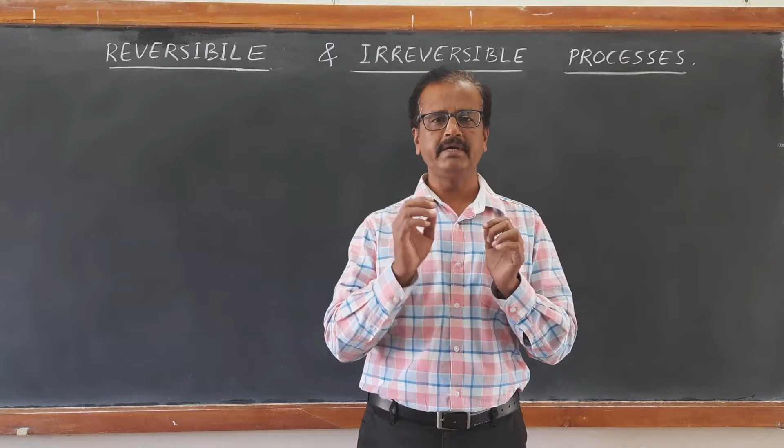Reversibility and irreversibility. First, let us understand the meaning of reversibility. Imagine a thermodynamic process which starts from initial state I and reaches final state F. Can it be possible to reverse this from final state F to initial state I without any change, without any effect in any part of the universe? In simple terms, if a thermodynamic process has taken place from initial state I to final state F, can it be completely brought back from final state F to initial state I without any loss of energy, without any loss of heat? If we think of this, we will get the answer.

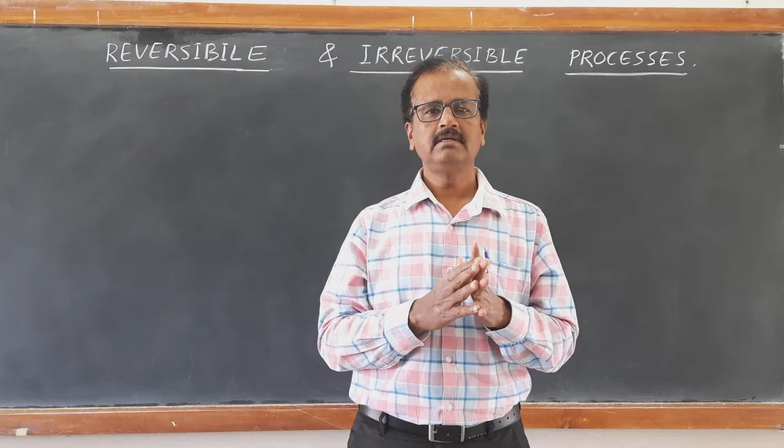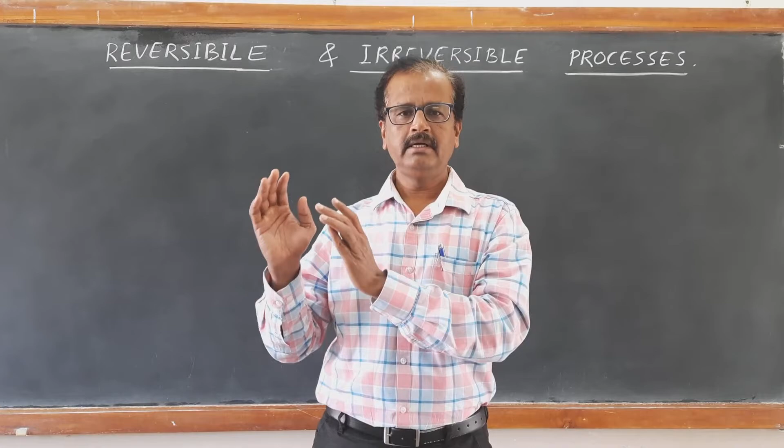Our experience tells us that it is not possible. So a reversible process is the one which, when it takes place from initial state to final state, can be reversed back from final state to initial state without any loss of heat, without any effect in any part of the universe. Such a process is called a reversible process, a reversible thermodynamic process.

But when we look at the spontaneous processes that take place in nature, we come to know that almost all the processes that take place in nature are irreversible. For example, when a chemical explosion takes place, when the explosion of a cracker takes place, sudden expansion of the gas takes place, sudden release of heat takes place. Can it be reversed back? It is not possible. Similarly, consider an internal combustion engine like a 4-stroke engine.

Or a bike engine or even a car engine, an automobile engine, when vapor of petrol mixes with air, and when the combustion of petrol mixed with air takes place with the help of a spark plug, sudden expansion and sudden release of heat takes place, which leads to doing work on the movement of a piston. Can it be reversed back entirely? It is not possible. So in this way, if you look at the spontaneous processes that take place in nature,

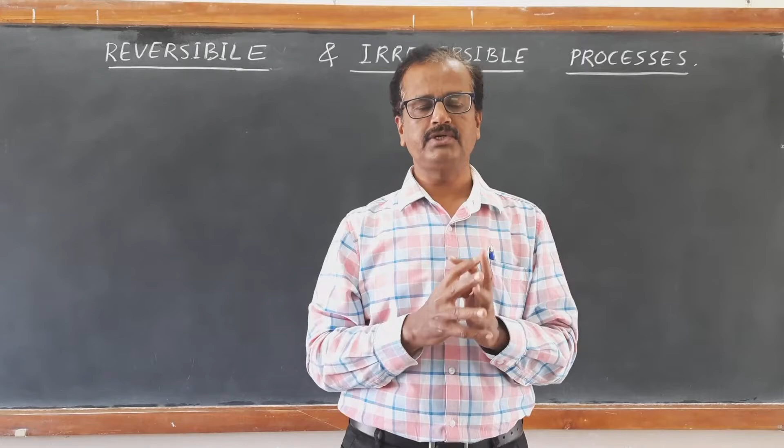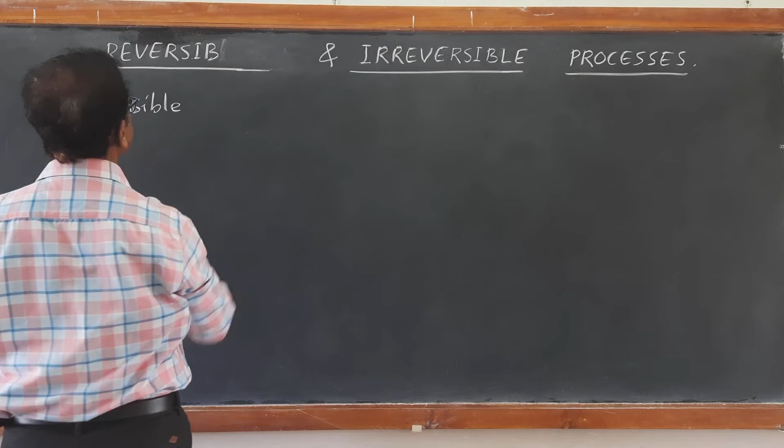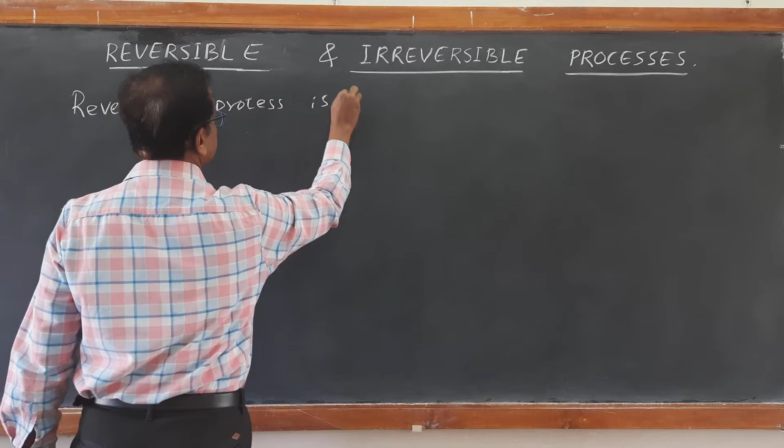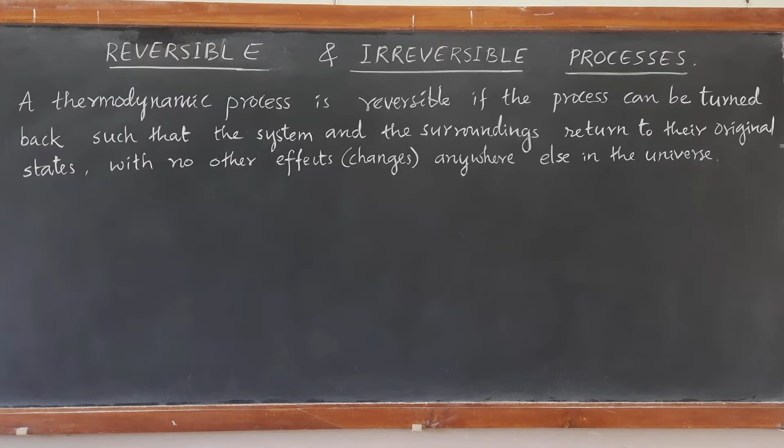So first we will define what is a reversible process. Reversible process is a thermodynamic process which can be completely reversed to attain the initial state, without any loss. A thermodynamic process is reversible if the process can be turned back such that the system and the surroundings return to their original states with no other effects or changes anywhere else in the universe.

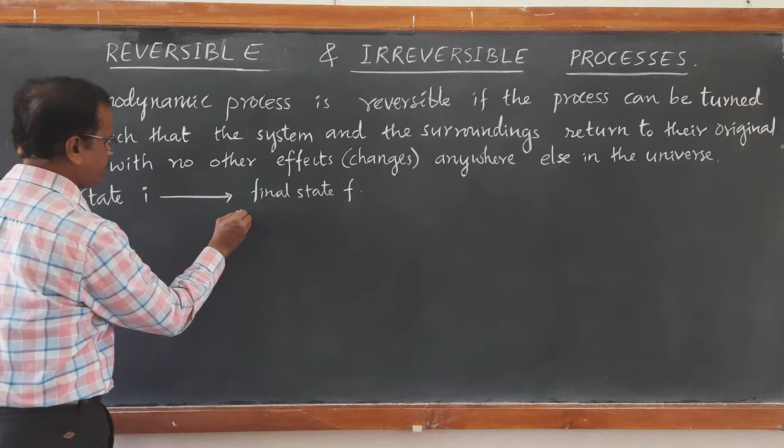If an initial state I changes to a final state F through a thermodynamic process, this can be turned back from final state F to initial state I without any change, without any effect in any part of the universe.

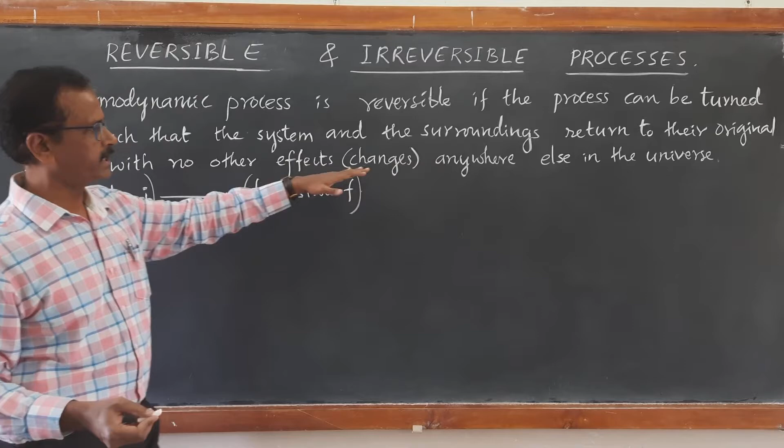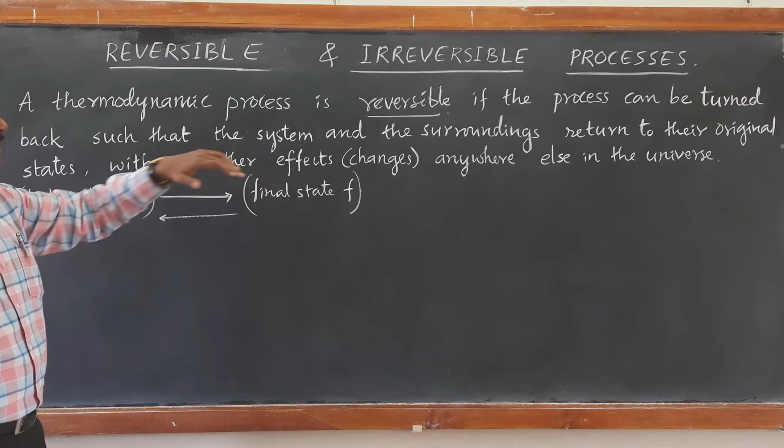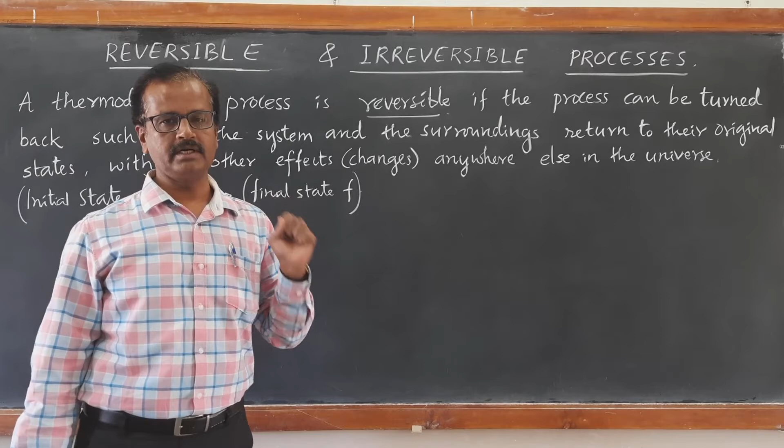Such a process is called a thermodynamic reversible process. A thermodynamic process is reversible if it can be turned back such that the system and surroundings return to their original states with no other effects or changes taking place anywhere else in the universe. This reversible process is a very ideal process which cannot take place in nature at all. So if it is possible, what kind of processes will be reversible?

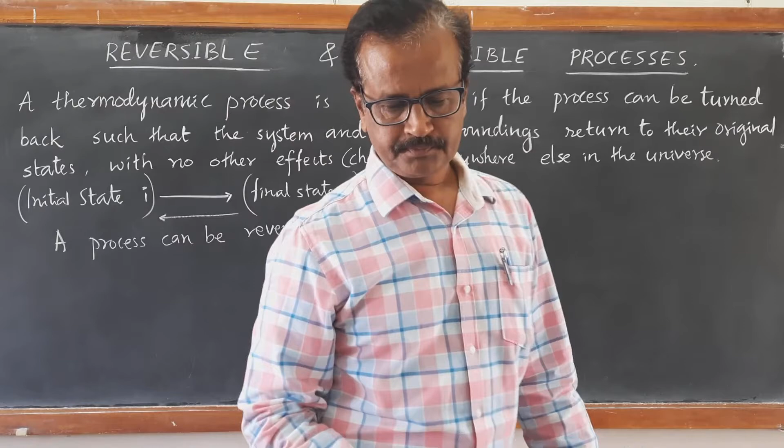A process can be reversible if there are no dissipative effects. No dissipative effects means there should not be any loss of energy in the form of heat, sound, deformation, etc.

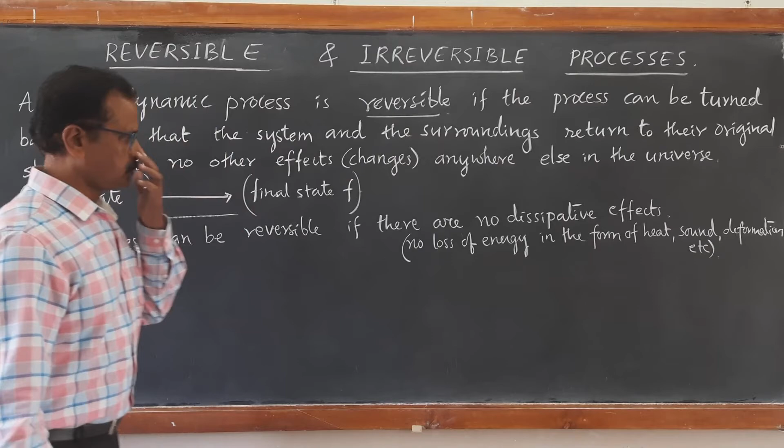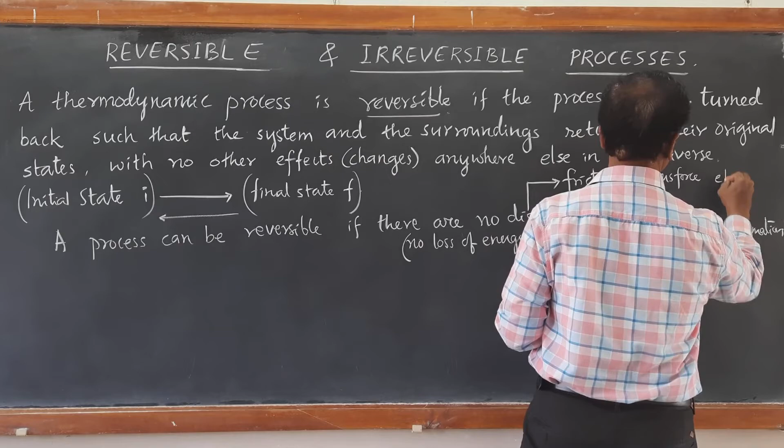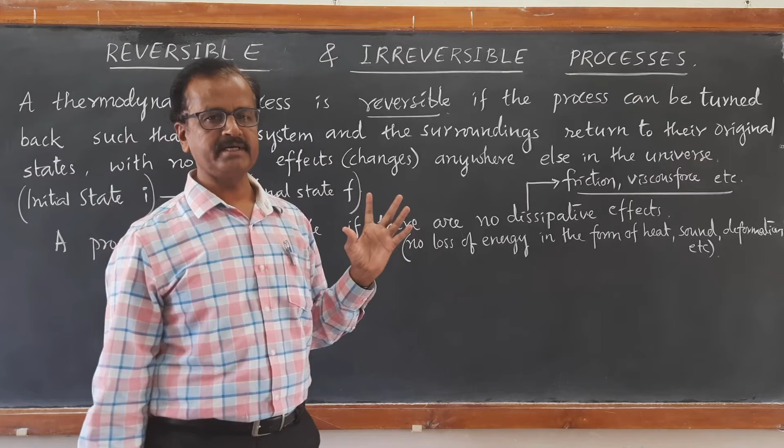If you take any spontaneous process that takes place in nature, there will always be some loss in the form of heat because of friction. So dissipative effects are mainly friction, viscosity or viscous force, damage due to collision, deformation, etc. Whenever work is done against friction or viscous force, some energy is lost against such dissipative forces. Such losses are called dissipative loss of energy, and the effects are called dissipative effects. If there are no such dissipative effects, then one can achieve a reversible thermodynamic process.

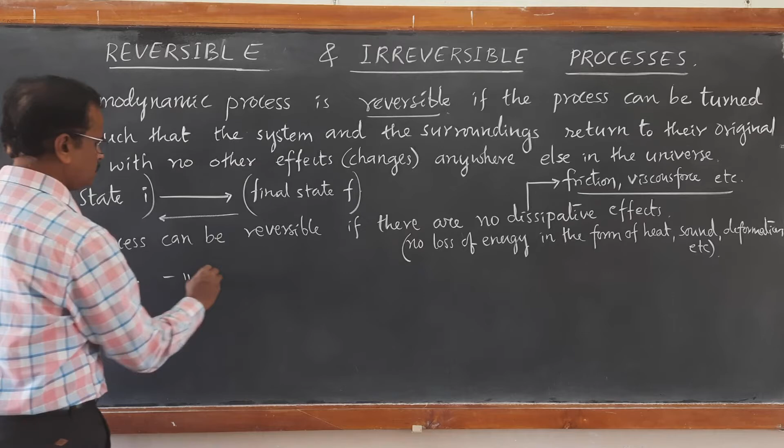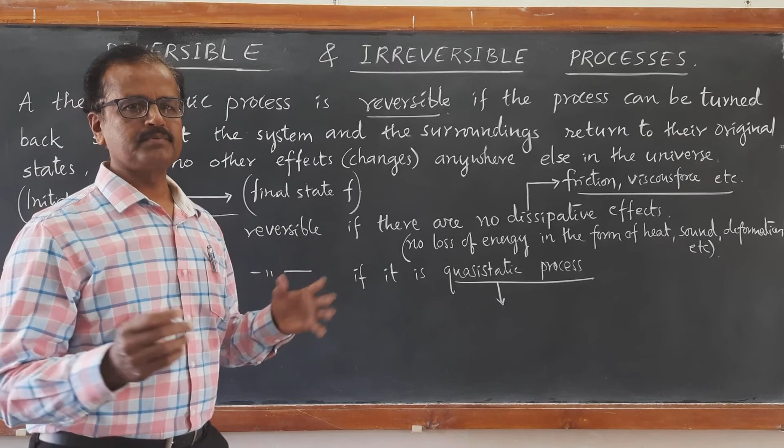Second, a process can be reversible if it is a quasi-static process. Quasi-static process - we need to understand the meaning of this term. A quasi-static process is one which takes place at an infinitesimally slow pace, which takes place very, very slowly.

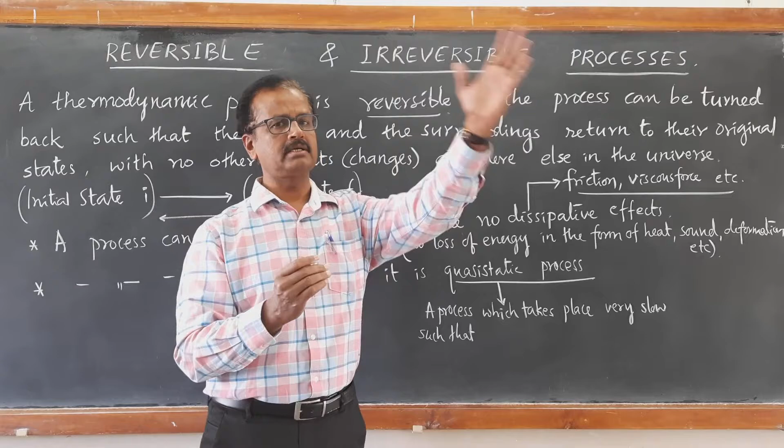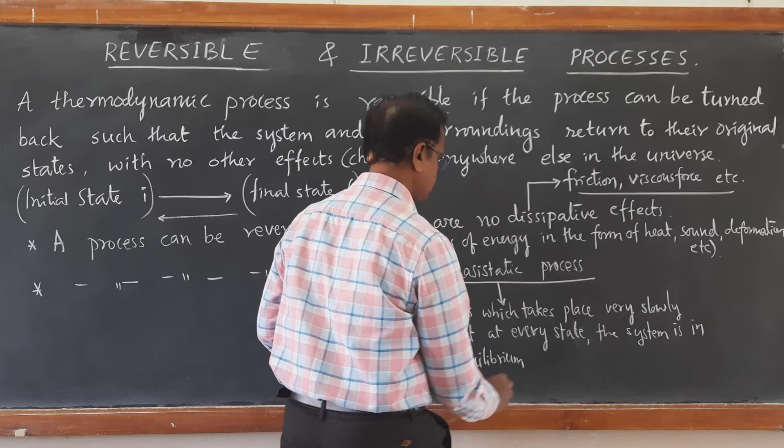It may be an isothermal process or any other thermodynamic process. If it takes place very slowly, such that at every moment there is a thermodynamic equilibrium existing between the system and the surroundings, such a process is called a quasi-static process.

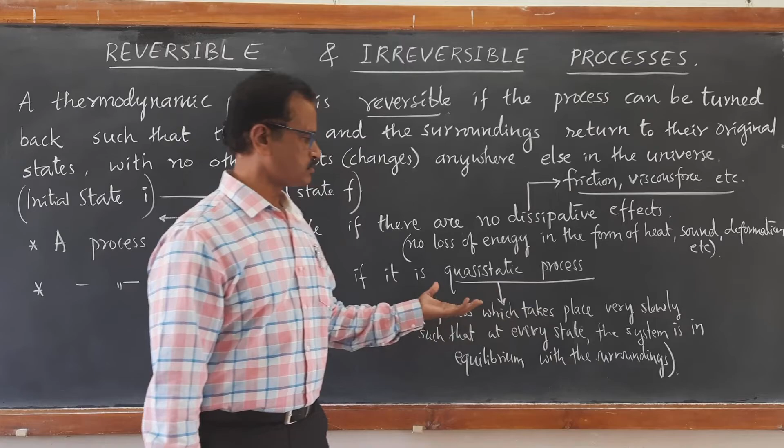So when a process takes place infinitely slowly, such that at every stage the system is in equilibrium with the surroundings, such a process is called quasi-static process. If a thermodynamic process is quasi-static in nature, then it can be a reversible process.

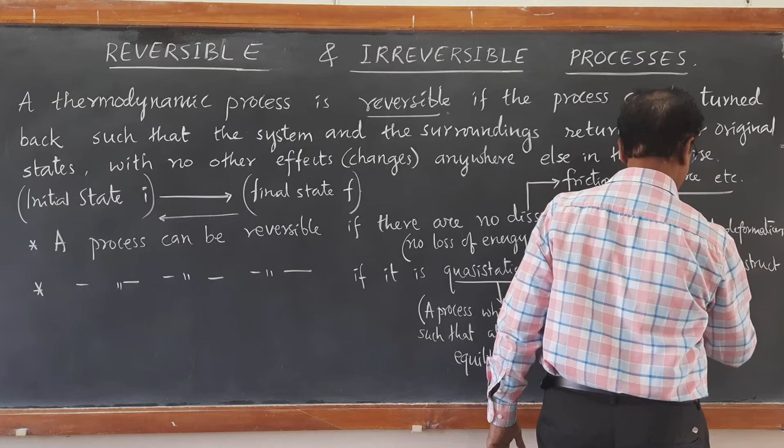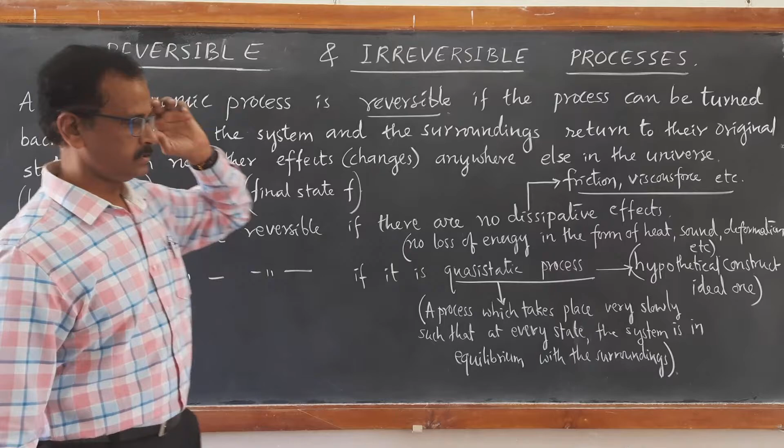Quasi-static process is again a hypothetical process, a hypothetical idealized construct, meaning an ideal one which cannot actually exist in nature. So such a process is called thermodynamic reversible process. Almost all the processes that we notice in nature are all irreversible thermodynamic processes.

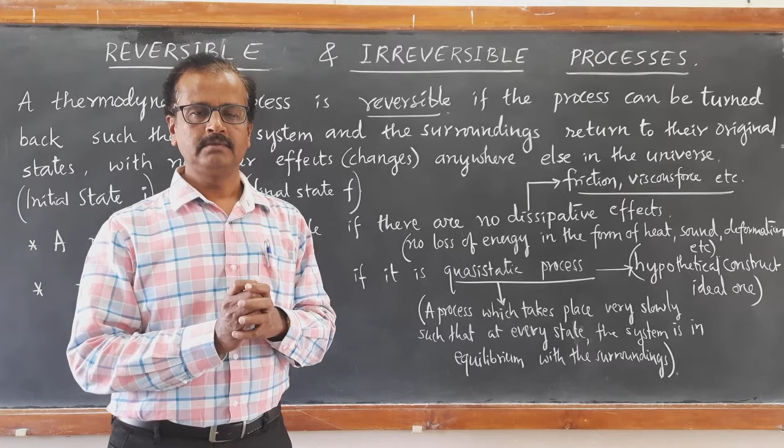If it is a reversible process, then according to the first law of thermodynamics, entire heat can be converted into work, and the efficiency of that system becomes 100%. But we studied yesterday the second law of thermodynamics, which states that no heat engine in nature can have 100% efficiency. Therefore, irreversibility is the law of nature.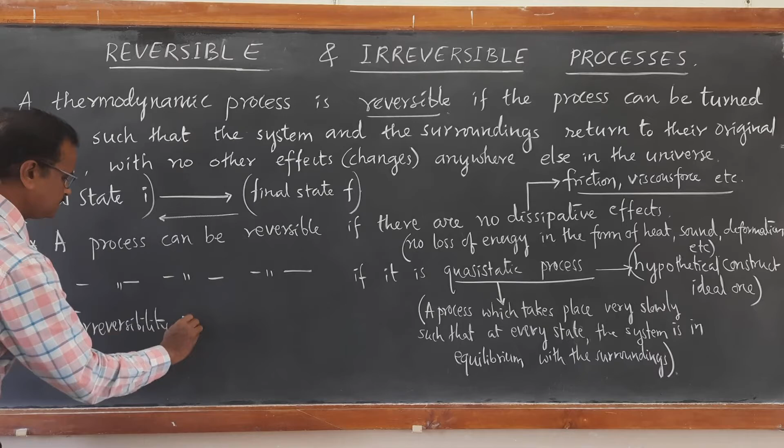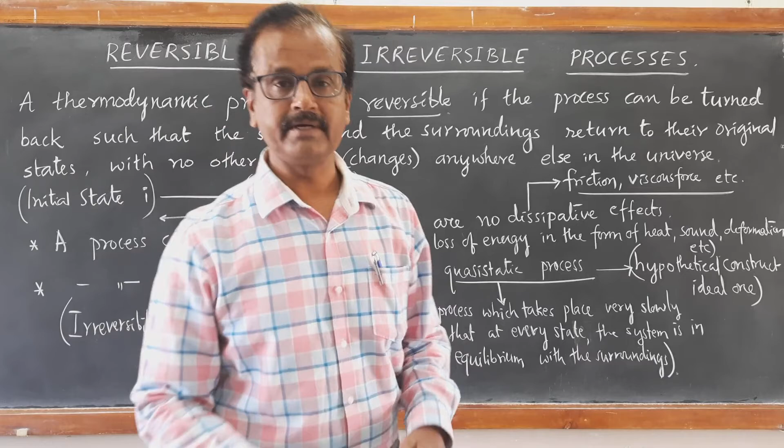So we can conclude irreversibility is the rule of nature, which is concluded through the second law of thermodynamics. There is always some amount of loss of energy to the surroundings. So we cannot have a thermodynamic process which can take place without any change in the surroundings or any part of nature. Therefore, irreversibility is the law of nature.

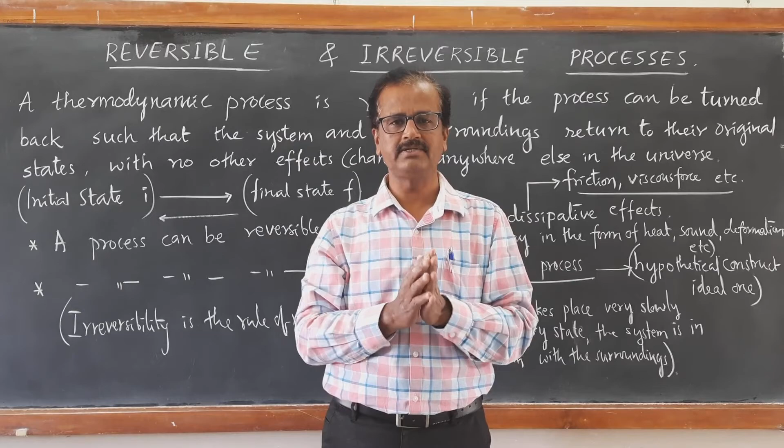Reversibility is a very idealized, hypothetical construct. A quasi-static process can be reversible. Think of a cylinder fitted with a piston in which we have taken an ideal gas. Ideal gas itself is an ideal one which never exists in nature. Suppose we take ideal gas as a working substance in a cylinder fitted with a movable piston.

If this ideal gas is allowed to expand isothermally at a very slow pace, then we can say that it is a reversible process.

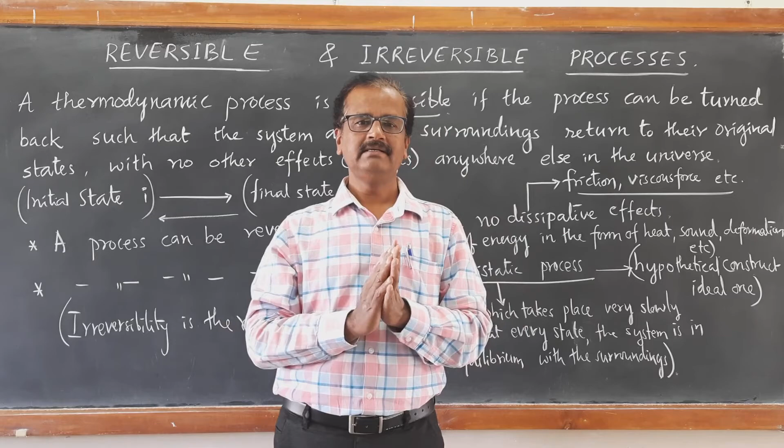So I can give you an example of a reversible thermodynamic process: isothermal expansion and isothermal compression of an ideal gas taken in a cylinder provided with a piston, which can take place at a very slow pace, so that the temperature of the ideal gas system with the surrounding is always constant. Temperature never changes. Such a process we know is an isothermal process.

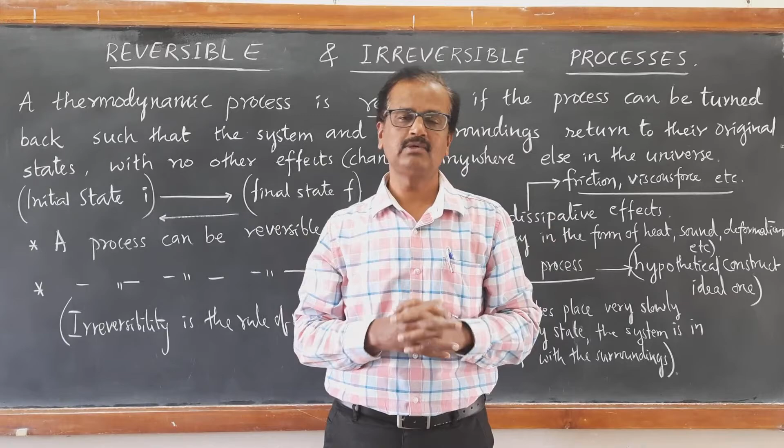So if an isothermal thermodynamic process takes place for an ideal gas as a working substance in a heat engine, and it takes place at an infinitely slow pace, then we can ideally say that it is a thermodynamic reversible process.

Otherwise, all the processes that we observe, like combustion of fuel in the internal combustion engine and external combustion engine like a steam engine, are always spontaneous and sudden expansion of hot gases takes place, which cannot be reversed.

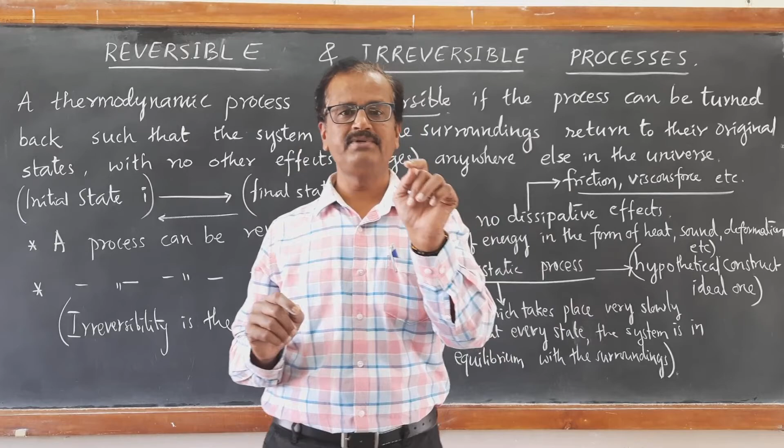Therefore, we get the reason why the efficiency of a heat engine can never be 100%. It is according to the law of nature, that is nothing but the second law of thermodynamics. I think you got the meaning of what are reversible and irreversible processes. So all the processes that we observe in nature are irreversible processes.

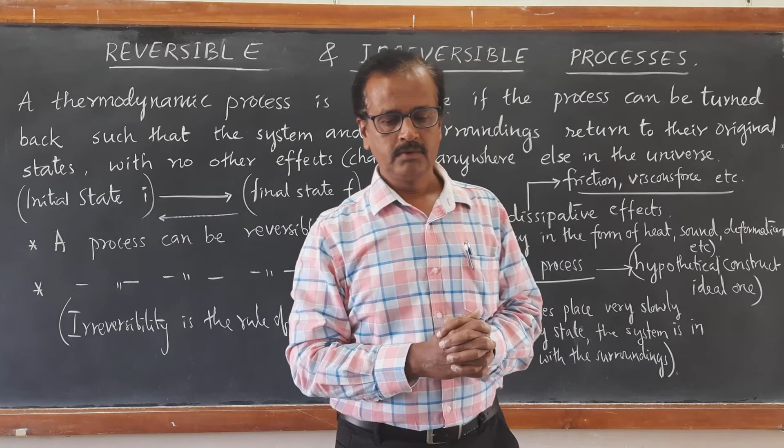Okay, now we shall solve some problems based on this topic.

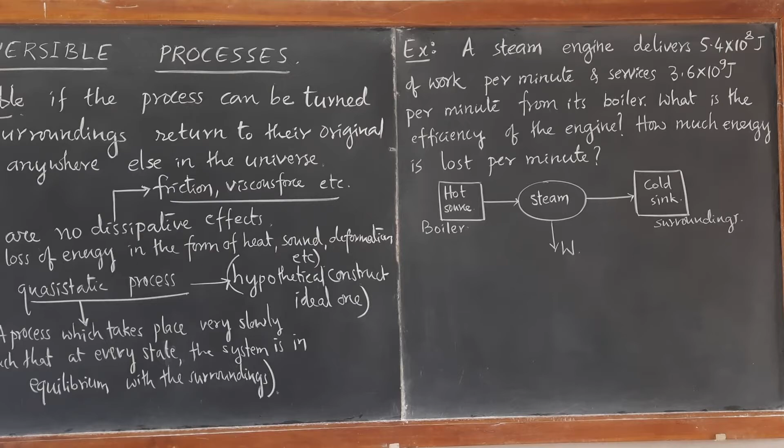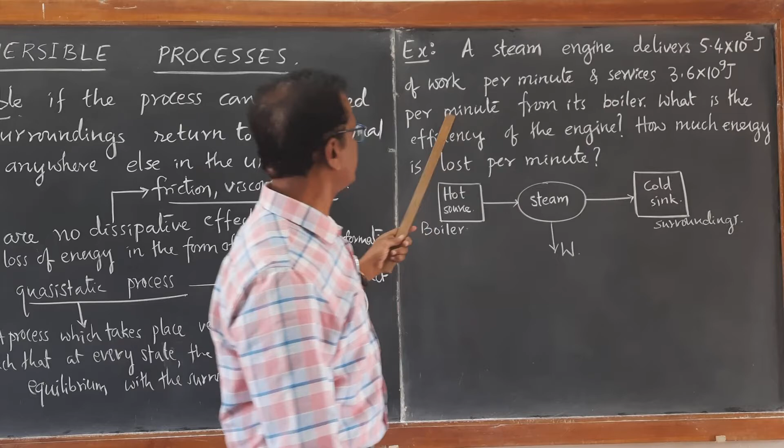Look at this simple problem. A steam engine delivers 5.4 into 10 raised to 8 joule of work per minute. It services 3.6 into 10 raised to 9 joule per minute from its boiler. What is the efficiency of the engine and how much energy is lost per minute?

So here is the schematic representation of a heat engine. This is a steam engine, an example of a steam engine. So the steam engine extracts heat Q1 from the boiler, which is 3.6 into 10 raised to 9 joule per minute.

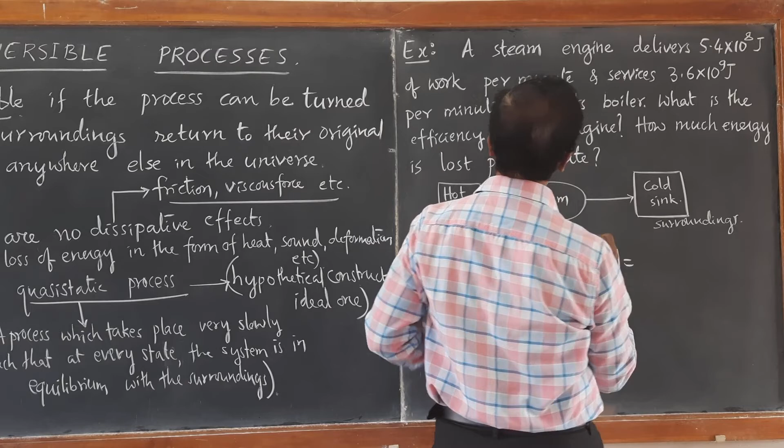And it delivers work equal to 5.4 into 10 raised to 8 joule per minute. It is given per minute. Okay, then you are asked to calculate what is the efficiency of the heat engine.

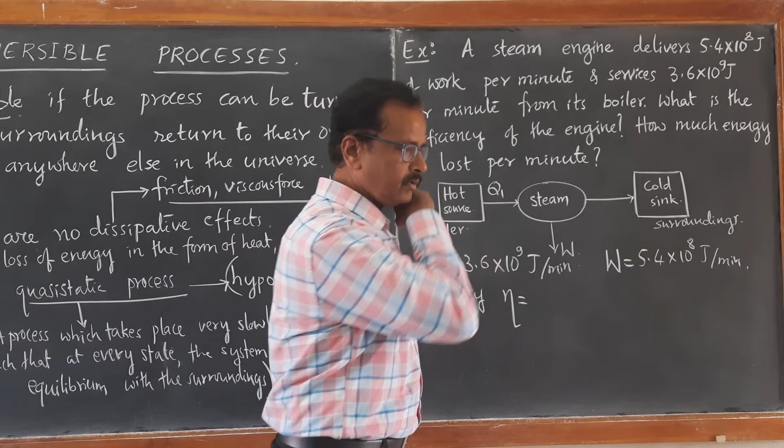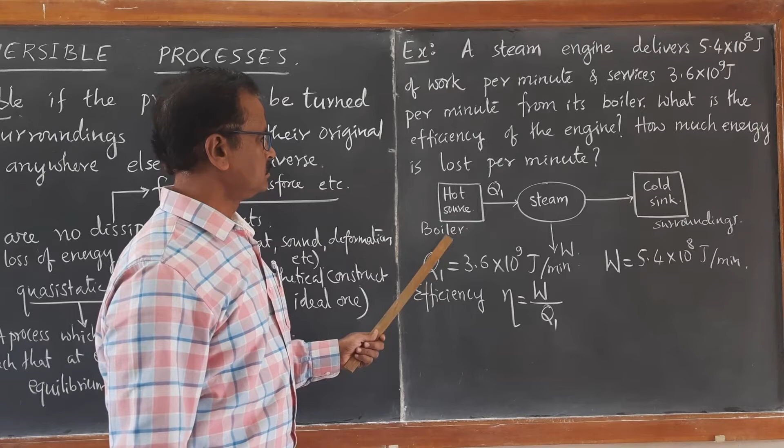So we know the efficiency of a heat engine is given by the amount of work output to the amount of heat extracted from the boiler. It takes heat from the boiler. Q1 is the heat taken from the boiler and Q2 is the heat that is released to the surroundings.

So we get Q1 is equal to W plus Q2. This is what we have learned. So we define efficiency as the work output divided by heat input from the source, heat input from the boiler.

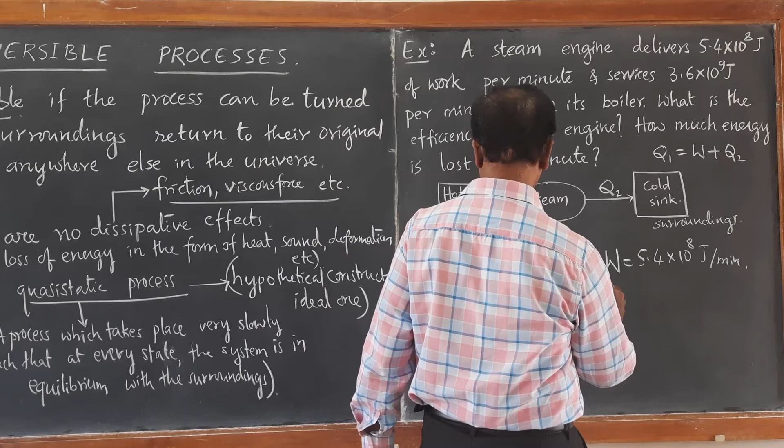So work output is given as 5.4 into 10 raised to 8, divided by 3.6 into 10 raised to 9.

So you can cancel here: 9 4s are... 9 6s are... or 18 2s are, 18 3s are. That gives 3 by 2 into 10 raised to minus 1. If you work it out, it becomes 1.5 into 10 raised to minus 1, that is 0.15.

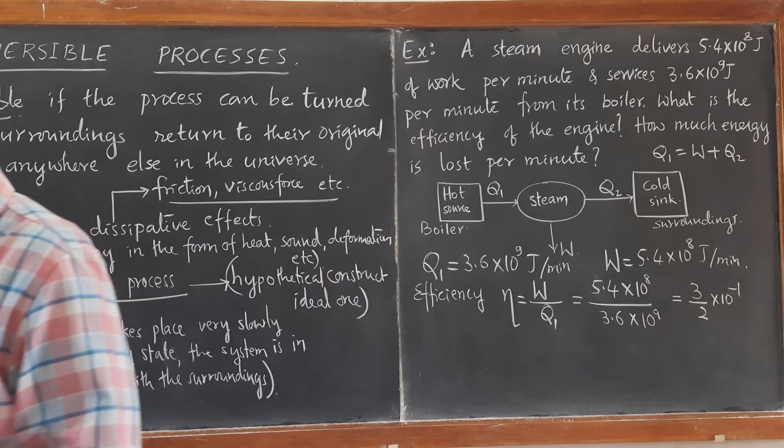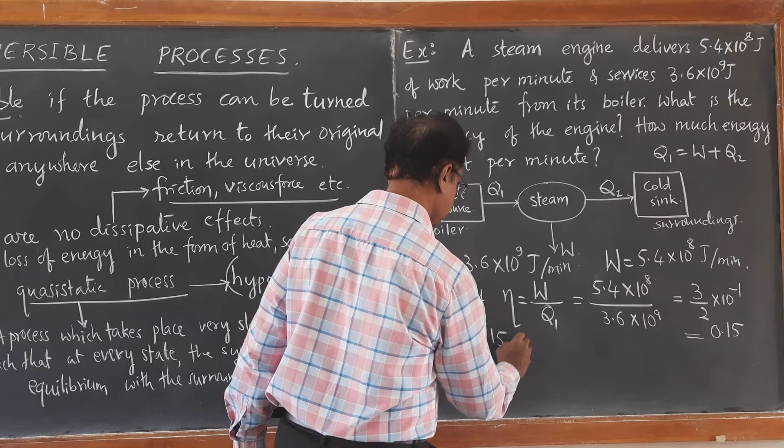So the efficiency is 15%, which comes out to be 0.15. Therefore efficiency is 15%. Now what is the loss of heat per minute?

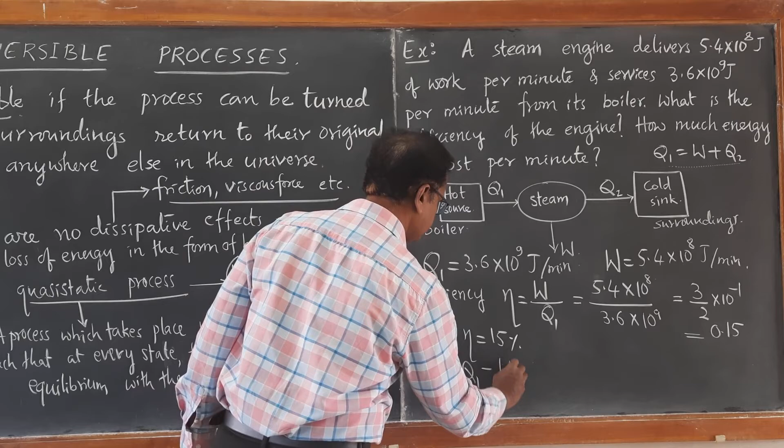So loss of heat per minute can be calculated using Q2 is equal to Q1 minus W. Q1 is 3.6 into 10 raised to 9, minus 5.4 into 10 raised to 8 joule per minute.

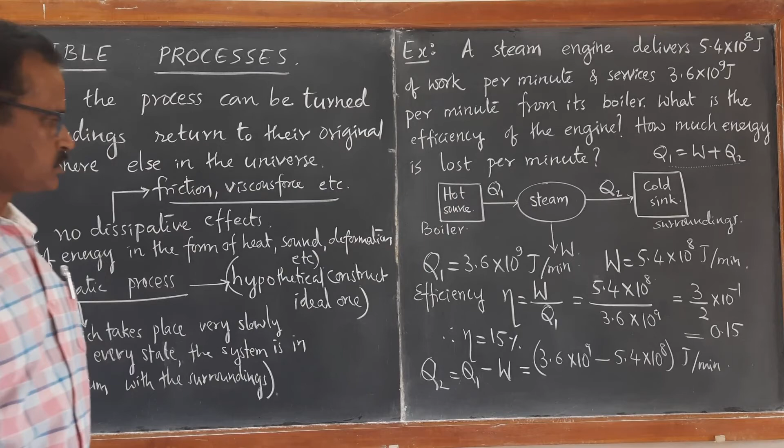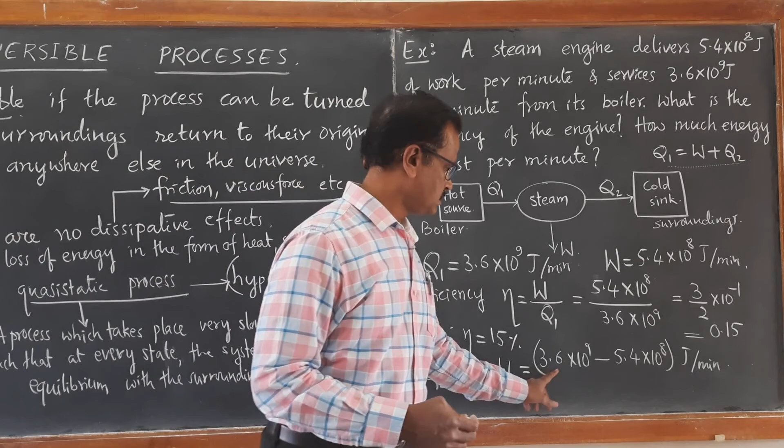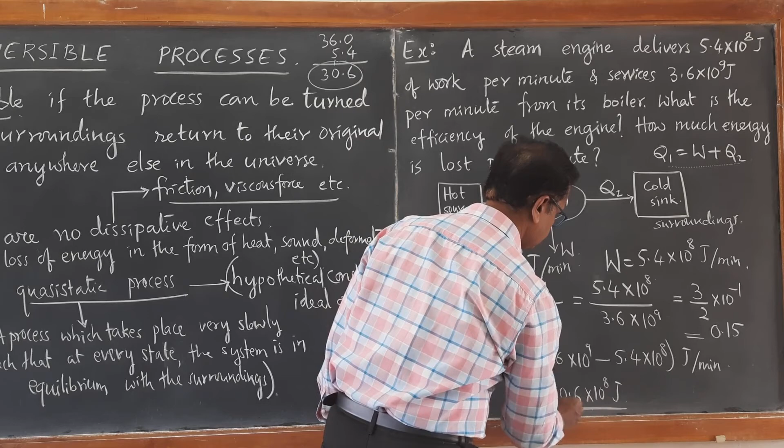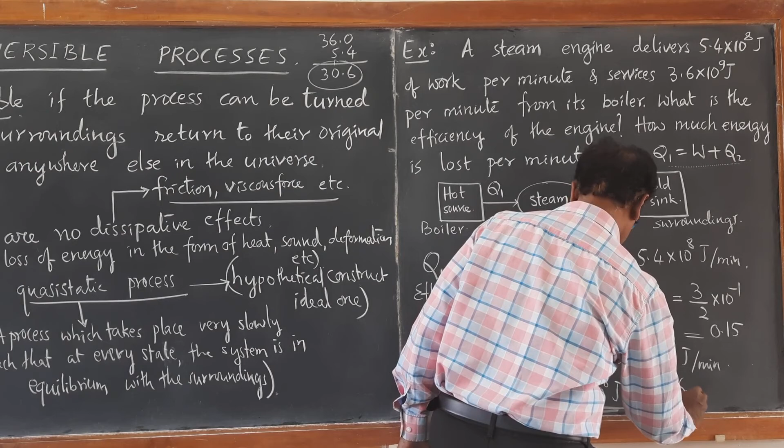So calculate this: 36 into 10 raised to 8 minus 5.4, that is 36 minus 5.4, which comes out to be 30.6 into 10 raised to 8, that is 3.06 into 10 to the power of 9 joule per minute. This is the loss of heat.